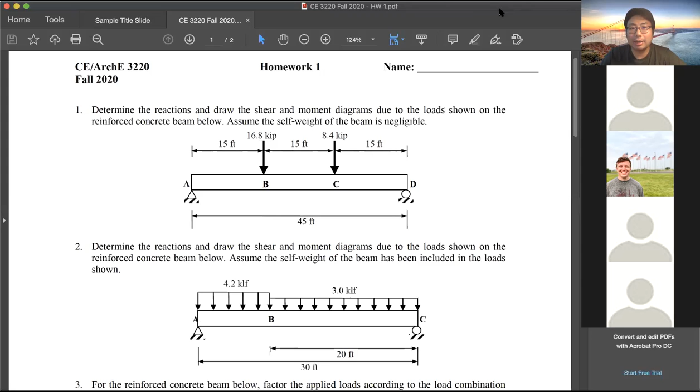So let me share the screen of the lectures. This is actually the first homework. You're gonna see something similar to that, not exactly identical, but something similar. So it's gonna be problem answers.

We have like 5 or 6 or 7 of each type of problem, so you need to solve them. Now for the format of the homework, what we need you to do is use either engineering paper or a blank white print sheet. Scan it or take a photo of it and convert it to a PDF file, then upload it to the assignment tab on Canvas.

Now, I want you to either print this out as a cover sheet, or when you're working it out one by one, copy the problem first. Throughout this copying process, by looking at the problem itself, you will not miss the key information from the problem. So that's mandatory. If you just turn in answers, the grader might have trouble identifying which problem that is, so we may take off some points. Make sure you have the problem copied at the first page.

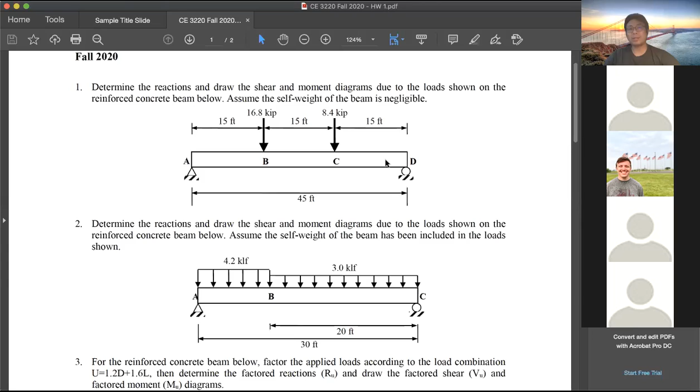So we'll talk about some of the problems, but before that, let's go back to the slides. We finished talking about chapter 2, which is design. So I want to do a little bit of review on what we talked about last time.

So I have this question. If I have a design strength and I want to get my nominal strength, and then once I have my loading, I will get my ultimate strength, MU. So on my left-hand side I have MN, which is nominal strength, and on the right-hand side is the ultimate strength. So which one should be higher? Nominal strength MN or ultimate strength MU?

Khalid, you still there? Yeah, I'm here. Oh, I'm sorry, you're gonna be my first victim today. It's okay - MN should be greater than MU, or equal to. So you think MN should be bigger than MU or equal to, right? Yeah. Okay, that's the correct answer. Good. So the key thing is we have to make sure that the nominal strength is bigger than the ultimate strength. That's from the second chapter.

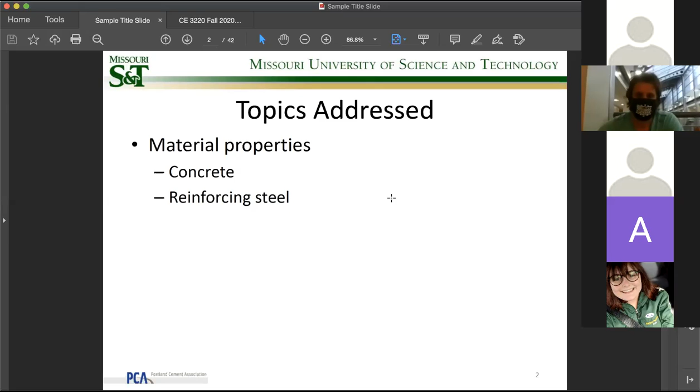Now, once we finish the design process, we'll start looking at materials. So for reinforced concrete, of course we'll have the concrete, and we also have the reinforcing steel. So today we're going to talk about them separately.

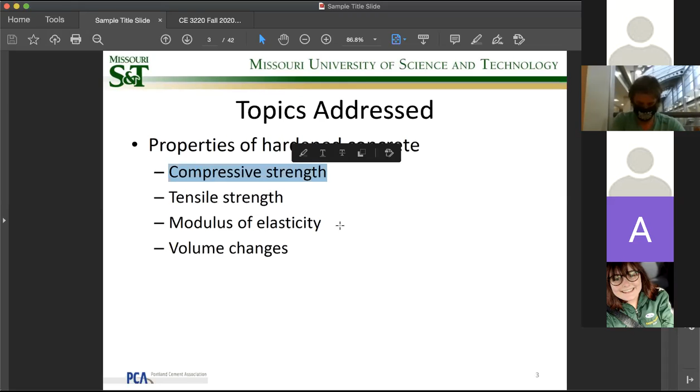First of all, concrete. We know concrete has a wet or dry state, uncured and hardened state. Right now we are mainly interested in the hardened state. For the design purpose, these are the parameters we're interested in: compressive strength, how much concrete can take in terms of compression; tensile strength, how much concrete can take in terms of tensile stress or crack; modulus of elasticity, Young's modulus; and volume change. These are the 4 critical parameters we're going to use to evaluate the concrete.

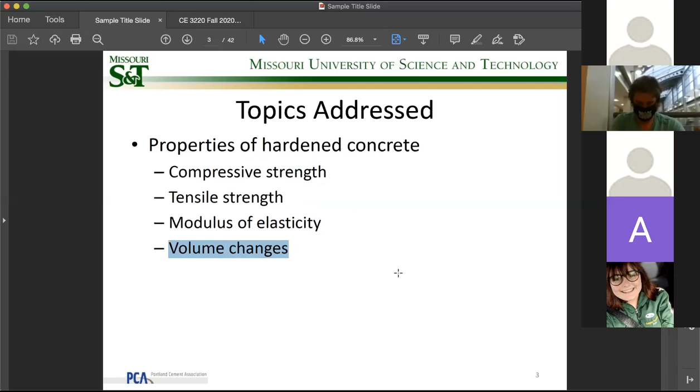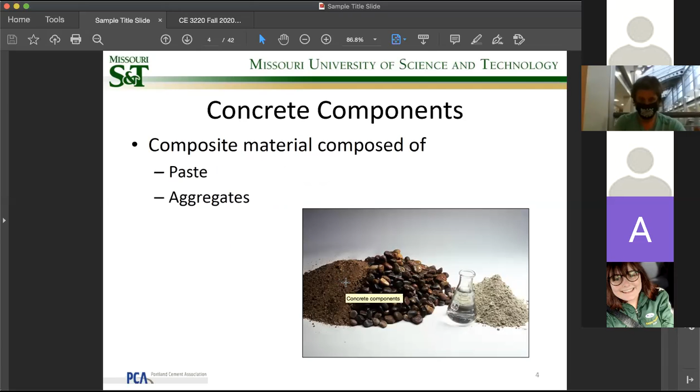Concrete is composed of a paste and aggregates. We have the coarse aggregates like pebbles or rocks, and the paste and powders mixed with water, and then everything cemented together. That's the composition of concrete properties. Now the paste is actually a very ancient material, dating all the way back to Portland cement. Actually, the ancestor of that is pozzolan cement, which includes fly ash, silica fume, and ground granulated blast furnace slag.

These pozzolan particles, you can think of it as more like volcano ashes nearby volcanoes, where ancient people used this ash to mix as cement. They built a lot of buildings with it, and some of them are still standing today.

Portland cement is more of a modern construction material, and it's more chemically fabricated. We take some of the slag and dissect them into small particles and functionalize them to make Portland cement. And from the cement, adding some water, we have our paste.

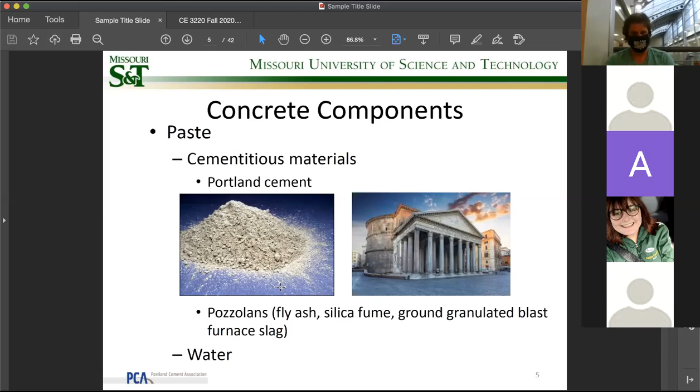From the aggregate side, we have two types of aggregates: coarse, which means gravel or crushed stones, or fine, sand. We usually get the fine sand from rivers or some seabeds. We don't usually use the seabed sand.

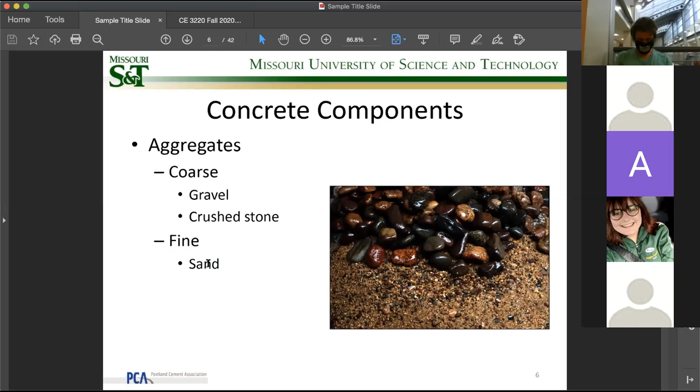The difference between river sand and seabed sand: river sand is more of sediments, their tiny particles having been filtered from water washing them. Seabed sand usually contains microbial organisms or animal skeletals. Typically, sand from ocean beds is pretty weak and ductile, so we don't usually use them as construction materials.

So we have all these components together, and they're organized in terms of percentages. These are general descriptions of the components. The paste takes usually about 25 to 40% - that's the majority part of the volume. Aggregates take about 60 to 75%. So you can think of concrete essentially as just aggregates binded by the cement. Hence we usually call the cement a binder or binding material - like glue to glue those big rocks together.

So we don't usually use a lot of cement, because cement is expensive - it's kind of expensive. So the cement is only 7% to 15%, a very small portion of it.

And we use quite a bit of water to mix it - 14% to 21% water. We also need some air, and the main purpose of the air bubbles is to allow the concrete to flow better. So that's a rough composition of the concrete materials.

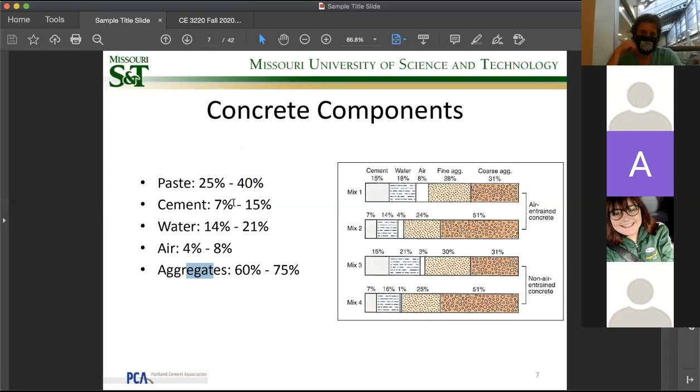So what are the important parameters for concrete we need to evaluate? First of all, we need to evaluate in terms of strength - that's for hardened concrete. The quality of the hardened concrete, meaning strength, is highly dependent on the amount of water used.

So the water-cement ratio is very critical. A higher water-cement ratio means your concrete is more flowable, liquid, but during hardening it has low strength. A lower water-cement ratio means you have higher strength, but it's very hard to work with. So there's a balance for the optimum water-cement ratio, depending on your need.

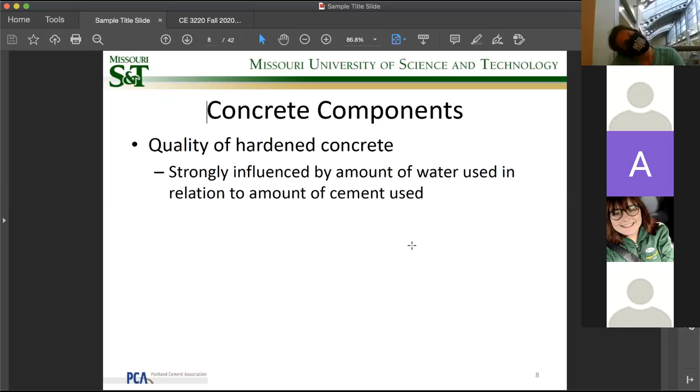We like to reduce water as much as we can to enhance the strength naturally. But reducing water doesn't always bring us benefits - sometimes it also brings disadvantages. But before that, let's take a look at the advantages of reducing the water ratio.

First, by reducing the water ratio, we increase compressive and flexural strength, making it stronger. What happens is, due to a low water-cement ratio, we have full hydration of the materials and are left with very few air bubbles afterward, after the water evaporates. So we have fewer structural defects, enhancing the compressive and flexural strength.

Because of the low porosity induced by this reduction in water content, we also have lower permeability. So the concrete is more impervious to water erosion or chemical attacks, which keeps the structure living longer.

So naturally, it also increases the resistance to weathering. How does that work? Say I have less amount of pores - that means less water or moisture goes into the concrete when it's wet. So naturally we have less of a freezing effect, as you all know from Physics 101: when water freezes, it increases volume, the ratio is 1.1. So with less pores, less intruded water, you get less volume inflation, less volume changes. So it has better weather resistance.

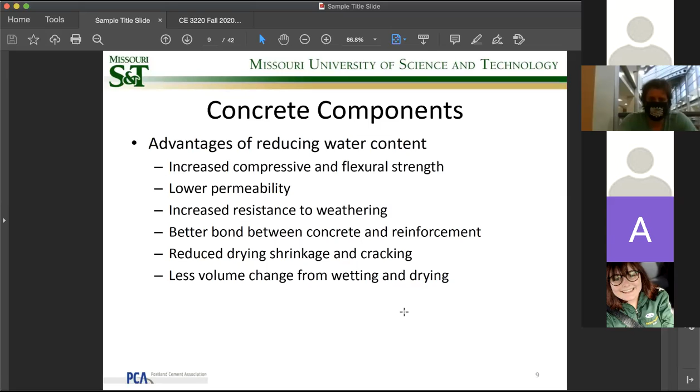Apart from water-cement ratio, a very important factor is admixtures added to the concrete. We have air entraining, water reducing, plasticizer, accelerating, and retarding agents. The main purpose of these chemical admixtures is to enhance the workability or strength of the concrete.

For example, if my concrete has a flow problem and simply gets stuck, I can add air entrainment. Air entrainment works like tiny lubricants between the aggregates and cement, letting the concrete flow more easily. It's like blowing bubbles inside muddy water; it actually flows faster.

And we have water reducing agents. Sometimes we add a lot of water at the beginning to allow fast construction, and after the concrete is poured, we want it to achieve early age strength, so we use a water reducing agent to extract the water out.

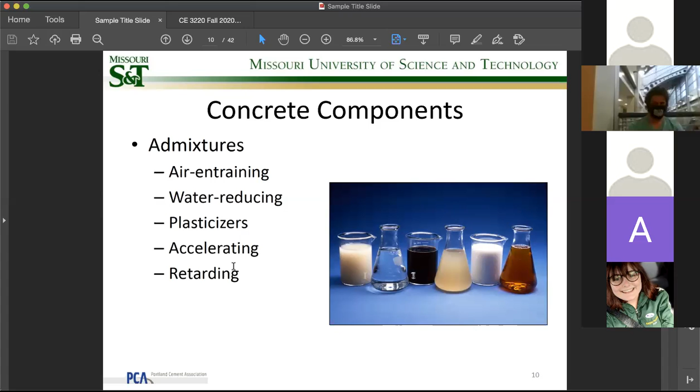We also have other admixtures. If we say these previous admixtures have immediate impacts on concrete, the following admixtures have a long-term effect. The most popular ones are corrosion inhibitors - chemical inhibitors added to the concrete to block the reaction pathway of corrosion.

So we have two types of inhibitor. One is chemically active, the other is physically active. One basically reacts with the chemical agent to slow down the reaction. The other simply blocks or fills the pores, reducing the amount of water that can transfer from the exterior surface.

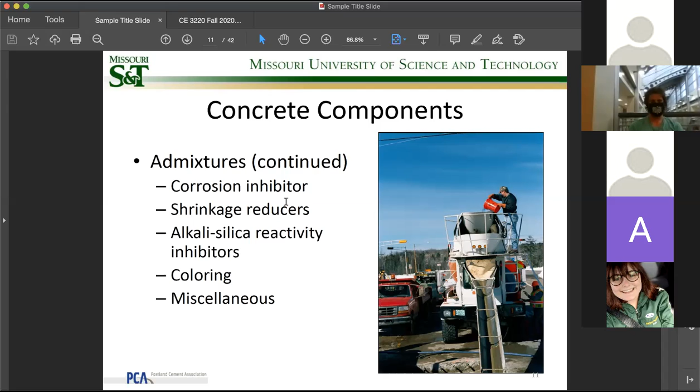to the reinforcement, okay? Now we also have shrinkage reducers that can reduce shrinkage, ASR inhibitors, alkali silica reactivity inhibitors, that's more of a chemical inhibitor. We have coloring, and we have all the other things for long-term performance of concrete. So it's a very well developed industry, we have so many admixtures to work with.

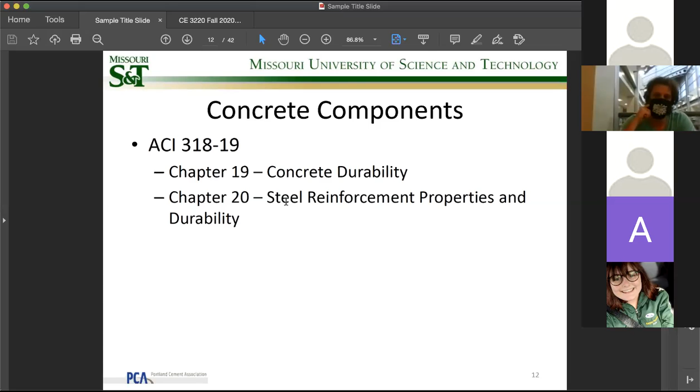Now, in terms of concrete, if we want to look at the properties of concrete and make sure they're following the standards needed for the design code, chapter 19 and 20 are the ones we're looking for here. So if you go to your ACI code book, chapter 19 and 20, you can find all the code related information.

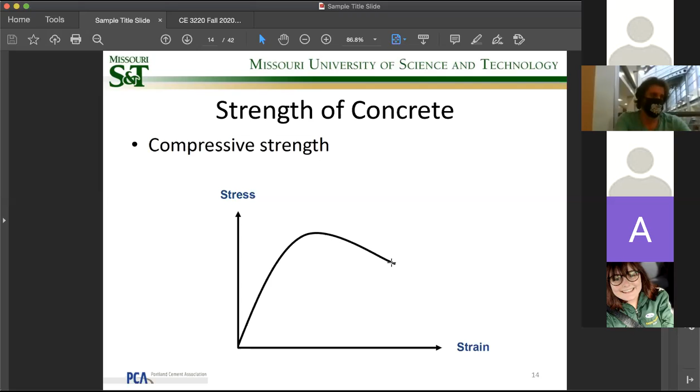And then for the compressive strength testing, we usually use a 6x12 cylinder.

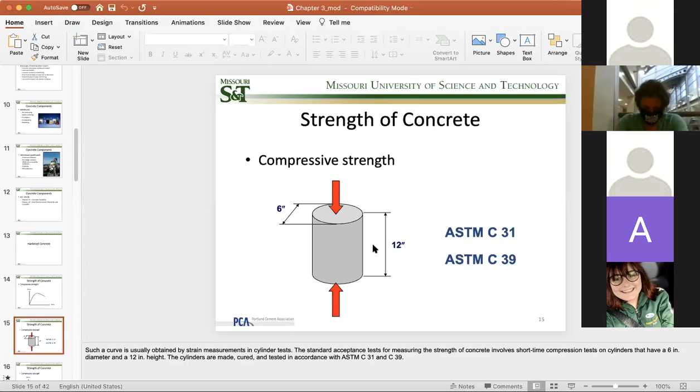All right, so we talked about the compressive strength. This is what it looks like. Now, there are several critical parameters we need you to understand. The peak strength, or the maximum stress you can get from a compressive strength test, is called F prime C. Later we'll introduce everything that we care about with concrete being related to this parameter, F prime C. This is the critical parameter you need to know.

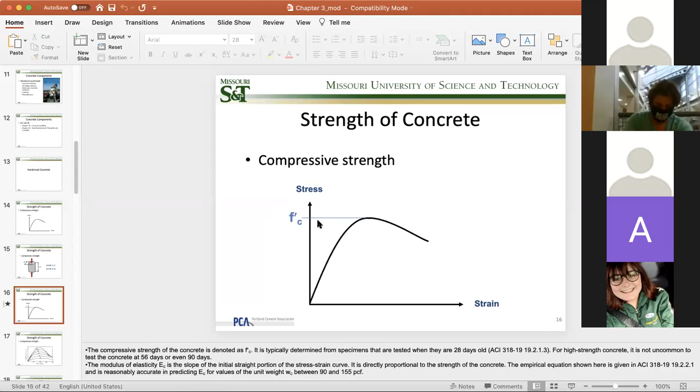As a matter of fact, if I have a different strength, this is what the curve will look like. You can see that if my strength is low, my curve is pretty flat, meaning I have a reduced elasticity modulus, a reduced strength, and an elongated failure strain. But when my strength goes higher, it becomes quite brittle. I have a higher elastic modulus, and a sharper drop in terms of strength.

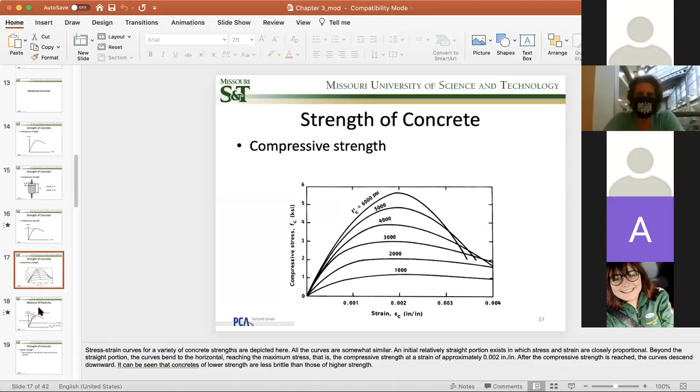To analyze this curve, these are some of the properties we need. So if I take the tangent line, I will have the tangent modulus of the material. But instead, we are using the secant modulus for the material properties. And this secant modulus is actually an equation. Let me put it here. The secant modulus is actually an equation of the peak stress.

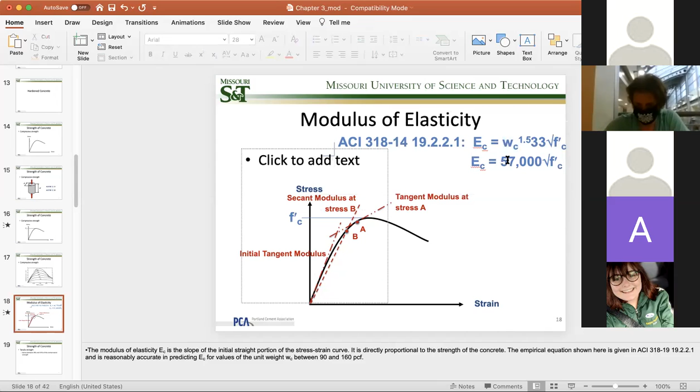There are two types of formula here. One, we can use the specific density of the concrete, WC to the power 1.5, multiplied by 33 and the square root of F prime C. F prime C is the compressive strength we just mentioned. Or we can use 57,000 times the square root of F prime C. This equation, 57,000 square root F prime C, is the one we use most of the time to estimate the elastic modulus, or modulus of elasticity, for the concrete.

If I give you the compressive strength F prime C in terms of PSI, the unit matters, you can plug it into this equation to get its Young's modulus or modulus of elasticity.

I think most of you guys have gone through the mechanics of materials class, so I'm going to randomly pick a student to help me out on the definition of modulus of elasticity. Let me go down my list. Adam, Mr. Hart, hello? Are you there?

Yes, I am. So my question here is about modulus of elasticity. Modulus of elasticity will give us a strain if I know the stress applied to the material, right? Or vice versa, if I know the strain the material is experiencing, and I have a Young's modulus, I can calculate the stress, right? So in simple terms, Young's modulus or modulus of elasticity equals stress divided by strain. You know that from mechanics of materials, right?

Quick question is, what's the unit for Young's modulus, or for modulus of elasticity? Shoot, I should know this.

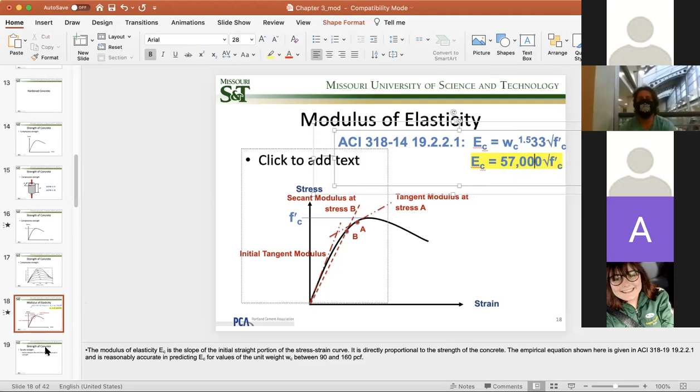So always follow the unit of pressure, okay? Good, that concludes the compressive strength of concrete. In terms of tensile strength of concrete, it's roughly in the ratio of 8% to 15% of compressive strength.

Now let me say something about the compressive strength of concrete. We normally divide concrete into these categories. Any strength below 4,000 psi is weak concrete, used for curbside or some paving, like hiking road paving, but not highway paving—that's low strength concrete. Strength below 6,000 psi is called normal strength concrete, so usually 4 to 6 ksi is normal strength. Strength beyond 8 ksi we call high strength concrete.

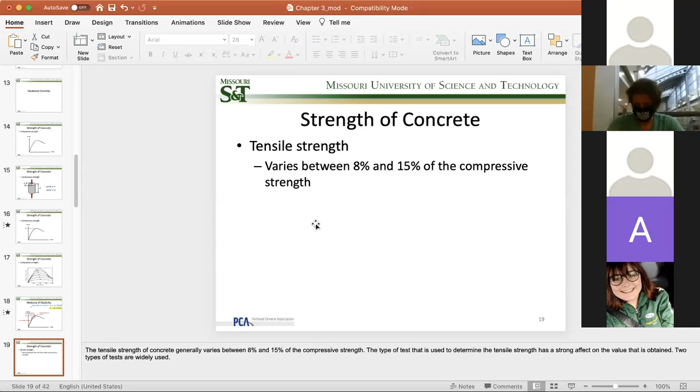So now, if we take a normal strength concrete, say 4,000 psi, 10% of that is... what is 10% of 4,000? Austin, Weicker, sorry, are you still there? Yeah, I'm here. What's 10% of 4,000? 400.

400, right? Have you done the material testing lab yet? I did take that last semester, yes. Okay, so do you know what roughly 400 psi is equal to?

It's not a lot, right? So give me an example—what's your household pressure washer, normal pressure, get up to? I actually don't know that. Okay, a couple hundred psi maybe, 50 to 100. Actually slightly higher than that—say for example my pressure washer I just bought last week has about 2,000 psi, and that's like household pressure. So 400 psi is like 1/5 of that, so it's very, very low pressure, isn't it?

Right, yeah. So the tire pressure for your car is about 30 to 40 psi. If you've checked your tire pressure, it's about 30 to 40, 32-ish, something like that. So 400 psi is about like, say, 10 to 15 tires worth of pressure, something like that.

Okay, so why am I saying these numbers? Thanks for the answer. I'm saying these numbers because I want you guys to know that the tensile strength of concrete is very, very low. I gave you a comparison.

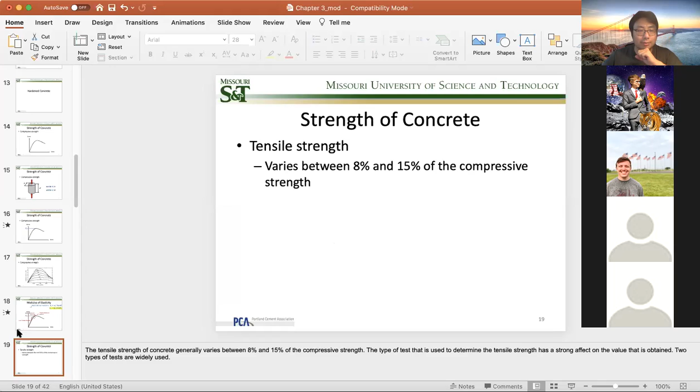The tensile strength of concrete is very, very low, so you will never rely on concrete to take any tension. It's always going to be the steel taking care of the tension. The concrete is good for compression, and the steel is good for tension. So never use concrete for tension, always use reinforcement for tension.

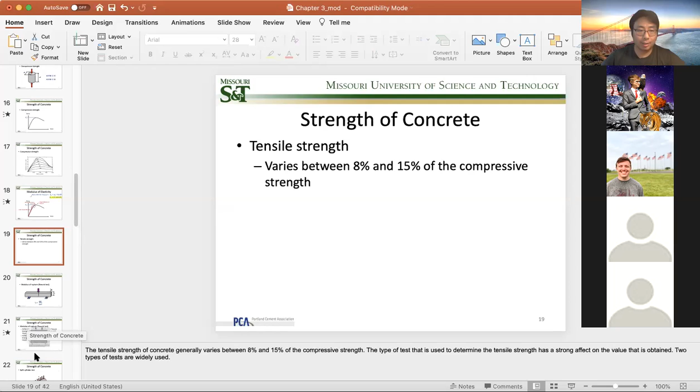Since the tensile strength of concrete is so low, it's of our interest to find out what it is.

We're gonna order a new ping pong net on Amazon. You're not muted, I can hear it. All right, okay, good. So let's get back to our tensile strength of concrete. I'd love to order something myself, but anyway.

So the tensile strength of concrete is very low, so it's of our interest to find out what it is. There are standard tests for us to test the strength of the concrete.

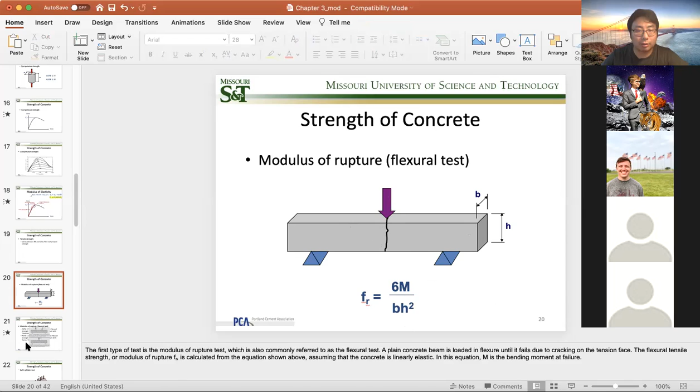That is calculated as FR equal to 6 times the moment, the bending moment exerted on the specimen, divided by B, which is the width of the specimen, times H, which is the height of the specimen, to the power of 2. So this is the equation we use to calculate the tensile strength of concrete: modulus of rupture.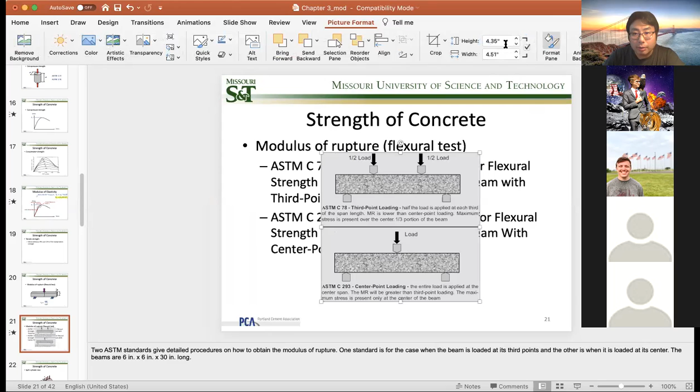So there are two types of tests: we have the 4-point load and the 3-point load. The 3-point load is also called center point loading. The lower scheme shown here is the most often used test.

Now for the tensile strength, there's another faster way using the same cylinder. We apply a line of pressure on top of the cylinder by supporting two ends of it. Through this experiment we also get the strength, but the stress distribution is not uniform.

As you can see, when we apply pressure on the top and bottom, there will be concentrated compression, and then afterwards it generates a tensile stress in the middle. When the tensile stress in the middle reaches its peak strength, it busts.

The equation to calculate this type of test is called the split cylinder test - just splitting a cylinder. It's FCT, where the subscript FCT equals 2 times the applied force P, divided by pi times L times D. L is the length of the cylinder, D is the diameter of the cylinder. That is the equation used for the tensile strength of concrete tested from the split cylinder test.

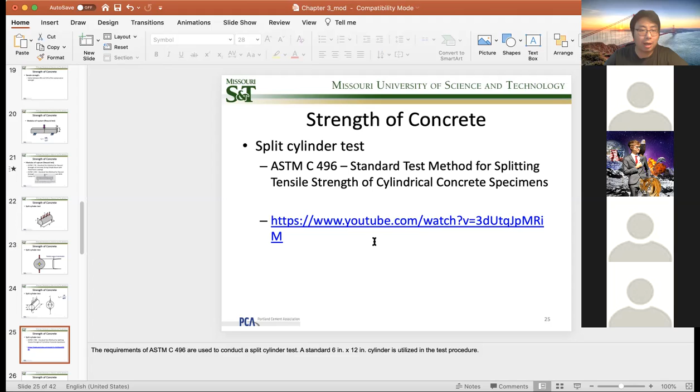Split cylinder test - there are a lot of standards. For the sake of time, you can watch a YouTube video on how they test it, so we're just going to skip ahead quickly.

There are relationships between compressive and tensile strengths. We know they grow proportionally - if the compressive strength is high, then the tensile strength normally is high too. The ratio between tensile and compressive strength decreases as the compressive strength increases, so there's a limit. If you increase the compressive strength indefinitely, your tensile strength does not increase correspondingly. So we say the tensile strength is roughly proportional to the square root of the compressive strength, F prime C.

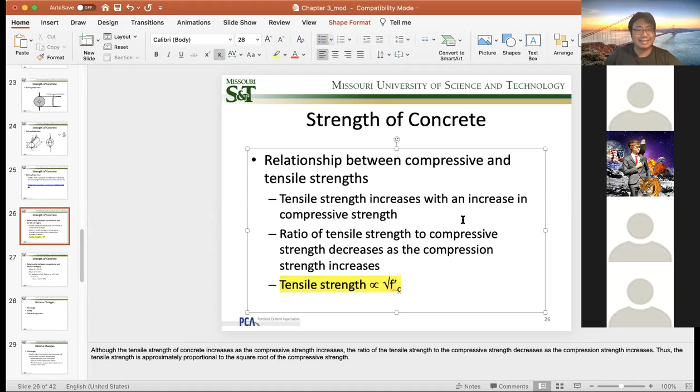All right, this is an important fact you need to know for the exam. For the strength of concrete, normally we test the compressive strength of concrete.

Sometimes we don't have the means and ways to test the tensile strength of concrete because it requires facilities. So what we do usually is use the compressive strength F prime C to estimate the tensile strength of the concrete.

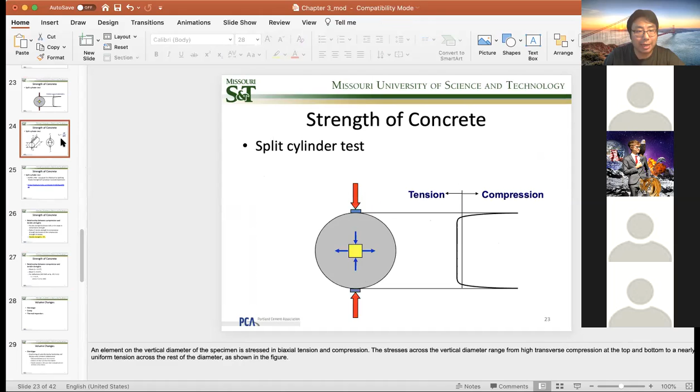So there are two tensile strengths we just mentioned. One is called the split cylinder, which is FCT, and the other is directly from the beam bending, which we call FR. So these are two types of tensile strengths.

The estimated relationship between them is that the split cylinder equals 6.4 times square root F prime C, and the modulus of rupture equals 8.3 times square root F prime C. But for deflection calculations in our code, it's 7.5 lambda square root F prime C for modulus of rupture.

For your homework, I want you to use this equation universally: 7.5 lambda square root F prime C. Now lambda is a type of concrete coefficient.

Lambda normally equals 1 for normal weight concrete. Let me type this out - normal weight concrete. And lambda will equal what? Lambda will equal 0.75.

Let me write down here, that equals 0.75 for lightweight concrete.

So be careful when you read from the problem, sometimes it's lightweight, sometimes it is normal weight, so we have a different factor here. The reason behind it is that when we have lightweight concrete, the aggregates are sometimes porous, so those are weaker aggregates and reduce lower stress.

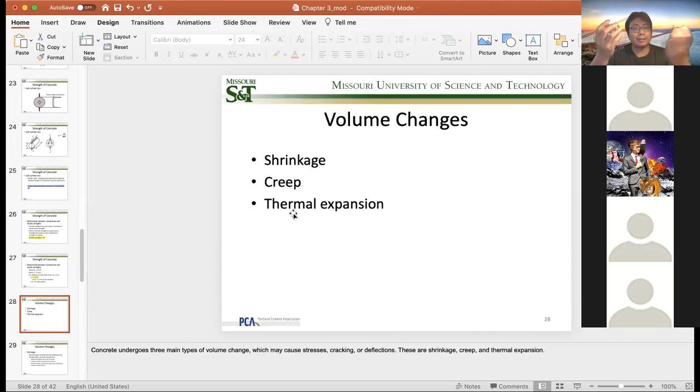All right, so talk about the shrinkage. What type of shrinkage do we have? First, we have the shortening of the concrete due to hardening, drying under constant temperature. So moisture means water just comes out from concrete through diffusion, and we have the outside surface that shrinks faster than the inside.

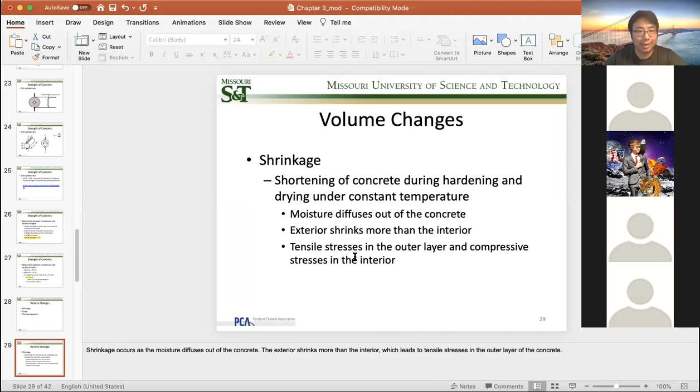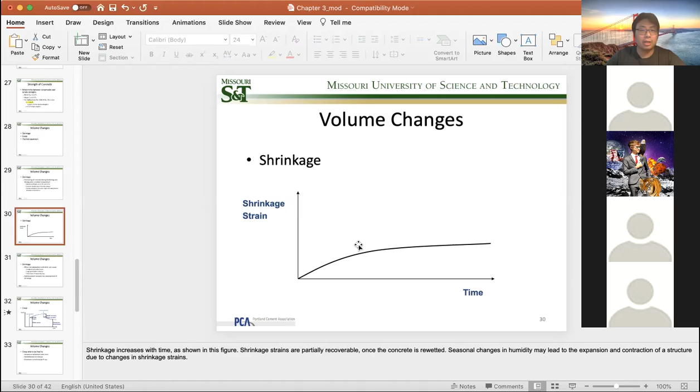All right, so for the volume change, the other more important factor is creep. So for now, I want you to know that there's a certain threshold.

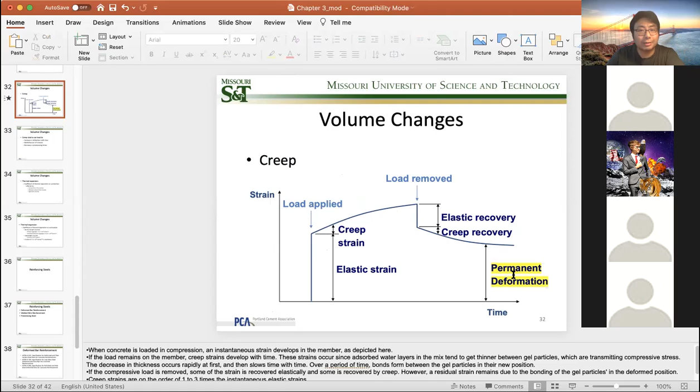So one message I want you to remember about creep is that creep will cause permanent deformation to your concrete structure. So creep is bad.

So the creep strain can lead to increasing deflection over time, meaning your bridge can sag, your building can - well not really collapse, but can shrink or tilt like the Pisa Tower, although Pisa Tower does not tilt for the same reason. It can also cause redistribution of stresses - basically some members might give up and others have to take more load. And it can also decrease the pre-stressing forces.

You learn from lectures in senior classes where you use pre-stressing concrete. Basically, you pre-stress a tendon reinforcement to let the structure become more rigid and take more load. But if your concrete creeps, it just reduces that force, so it doesn't have the effect you wanted.

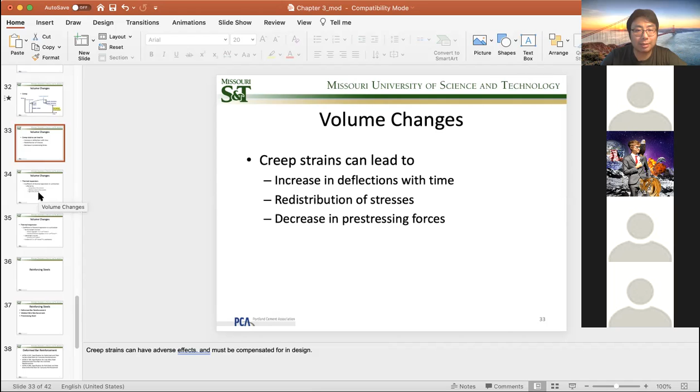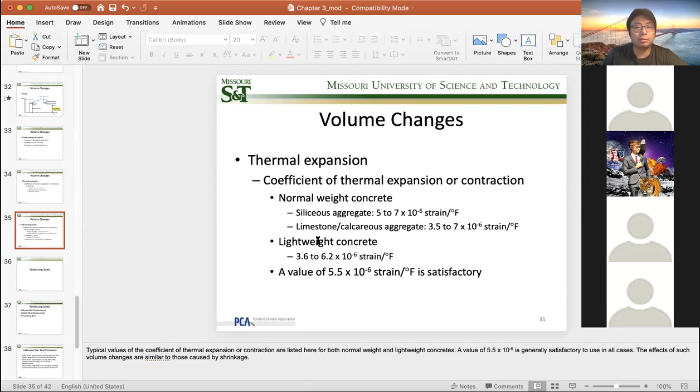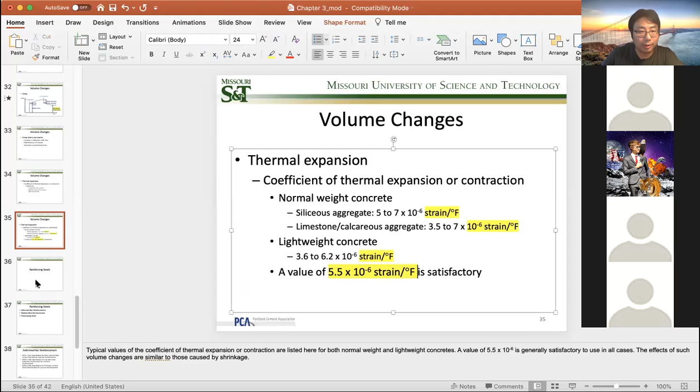A quick number you need to remember is the coefficient of thermal expansion. It's about 3 to 7, 10 to the power minus 6. The unit here is very important: strain, meaning no unit, per degree. I want you to remember this unit. These are roughly the levels of coefficient of thermal expansion. As you can see, 5.5 is the standard value we use for concrete, so not so much to worry about for concrete.

So far, let's do a quick overview or quick recap. All you need to do when you get the concrete: first, you do the compression test to get F prime C.

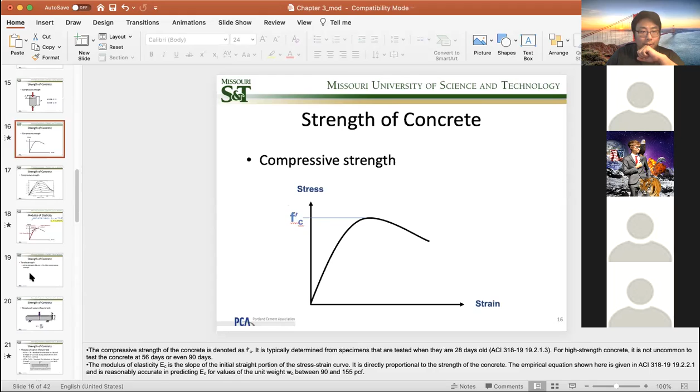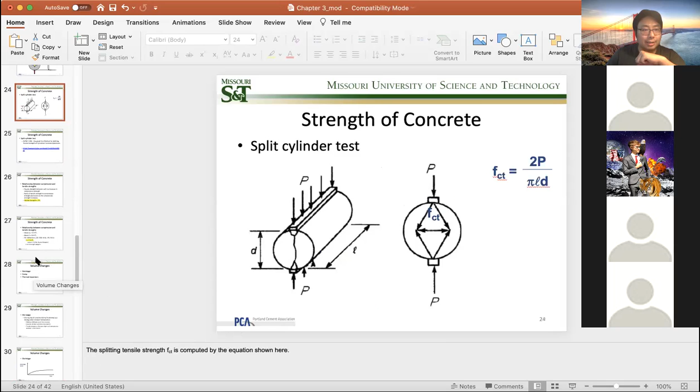If you have facility, you do the tensile test to get FR, modulus of rupture, and FCT, the split concrete cylinder split tensile strength. If you don't have these ways to test the concrete, you use the equation 7.5 lambda square root F prime C to estimate the tensile strength from the compressive strength.

But regardless, you always have to do the cylinder crushing test. This is the must. All right, so that's all about concrete.

So it's about the time to wake you up again. I'm thinking about the question: why do we need to have ribs for the bars? Okay, I'm gonna call our next victim. Who's on here? I'm gonna pick Dalton.

Yep, you still there? Yes, I am. All right, great. So the question is, why do we have to have ribs in a rebar? My guess is so that it can adhere to the concrete better, so there's no slipping inside the concrete once it's placed. Exactly, right, the slipping.

So let me ask you this: do you think we can put any rib on the surface of the rebar, or does it have to be a specific shape? I am not sure. My guess is it would depend on what we're using it for, what type of reinforcement it is. Okay, that's a good question, I'll let you go on this. So yes or no? Yes, it does depend on it, but no, we don't care that much.

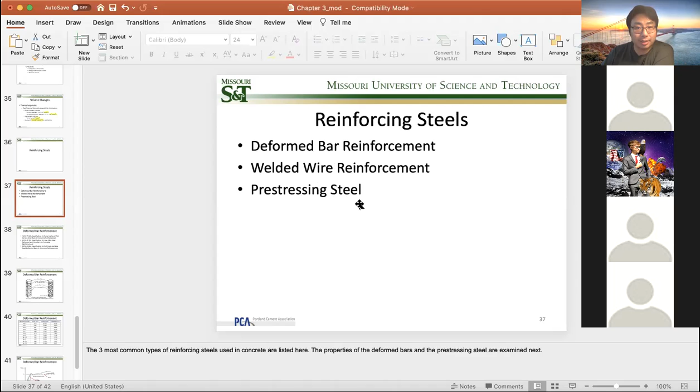All right, so there are a lot of standards for the rebars. I don't have to elaborate, you can find them. But I want to talk about the reinforcement details, these markings on the reinforcement. So let's take a quick look.

So if you're a civil engineer, you go on a job site, you pick a rebar, you read these letters, you can tell the construction workers what type of bar they are. You should be able to, or they'll laugh at you. I'm just joking, but anyway.

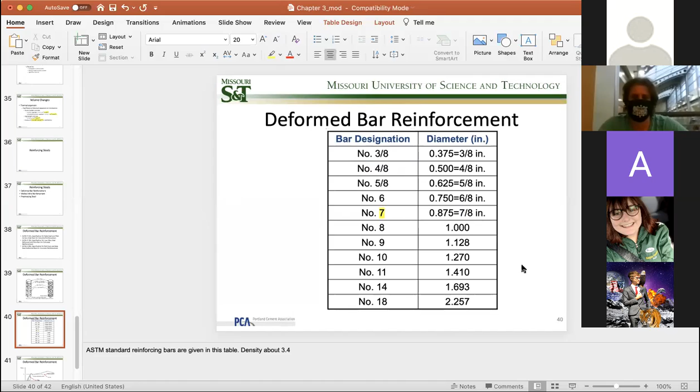That's right. So essentially, how the bars are numbered is 3/8, 4/8, 5/8. So when we say number 3 bar, it's 3/8. Number 4 bar is 1/2 inch. Number 5, etc. So this is just some of the rules that we use to remember the bar size.

Matter of fact, if I recover it for this simple trick here, you can actually use that to calculate the area. There might be a slight difference just because some of the ribs were not considered, but this is roughly equal to the conversion from the diameter.

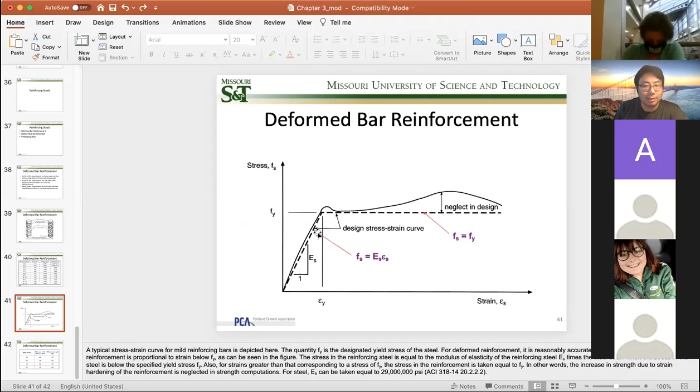I have a bump, and then it gradually comes up again and goes down again. Now, really keep in mind here, this curve is for hot rolled steel. Cold rolled steel does not give you performance like this. You'll probably know that from the steel structure design course later, but this is for hot rolled steel. So the distinct feature of the hot rolled steel is I can use this dashed line serve as a backbone envelope of this curve.

Basically, I can say your stress strain relation for the steel bar is a linear line and flat. And I'm going to take this peak strength here, Fy, of this flat portion as the yield strength - very important - the yield strength of the reinforcement.

Fy, this is called the yield strength of the rebar, okay? And this is our design strength. So the grading we're talking about here, 60, is actually the yield strength of the bar. So how so?

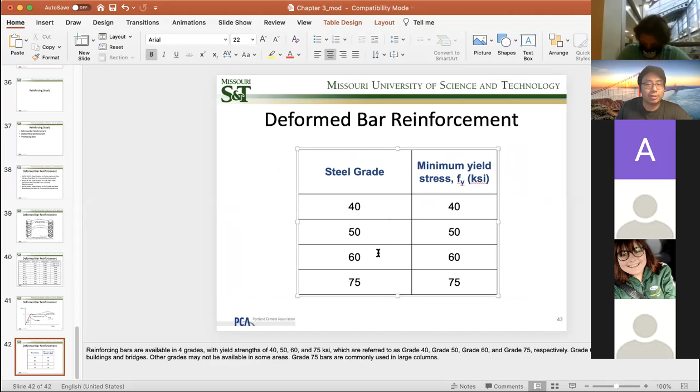If the grade is 40, that means I have a minimum yield strength of 40 KSI. The ultimate strength is 70 KSI, but I'll save you the trouble, just delete that. All you need to know for this reinforced concrete structures course is the yield strength, Fy. So grade 40 means 40 KSI, grade 50 means 50 KSI, grade 60 means 60 KSI, grade 75 means 75 KSI. You usually do not see any number beyond 75, that's as high as you can go.

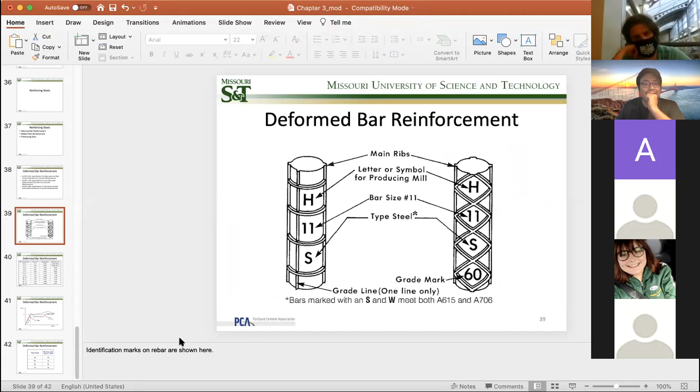So I'm gonna make a quick test here. Say I have a grade 60 rebar and a grade 40 rebar, and naturally 60 is higher than 40. So for the sake of construction, should I use all high strength rebar, or should I use different strengths of rebar? I'm gonna call on Aziz Alamari. Should I use universal strength for the rebar for all my buildings, or can I use different strengths for different locations?

Why do I use universal? Following the book, following the industry standard, we want to use universal to save cost. You're absolutely right, but actually, for design purposes, we use different sizes, we use different grades. But that's close.

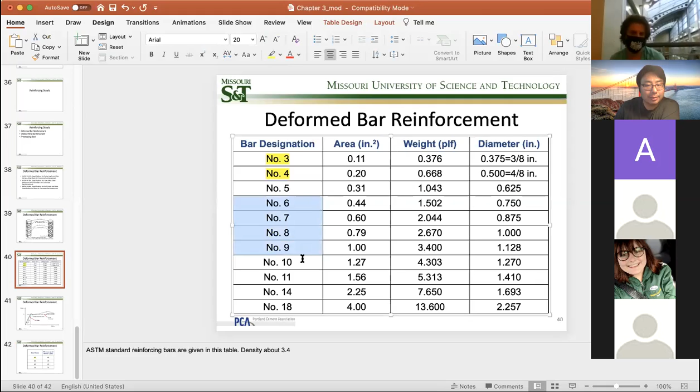So normally for the stirrups, for the hoops, for shear resistance, for the tiny size stirrups where we cannot have large diameters, we can only use number 3 or number 4 bars. That means if we use number 3 and number 4 bars, we'll normally pick grade 40. If we use number 6 or number 8 and above as the main reinforcement of beams and columns, we usually use grade 60, sometimes grade 75.

So take a look at this. The yellow highlighted 40 is usually for stirrups, for shear, for hoops, and 60 and 75 are for main columns and main structures of buildings. So these are some subtle differences.

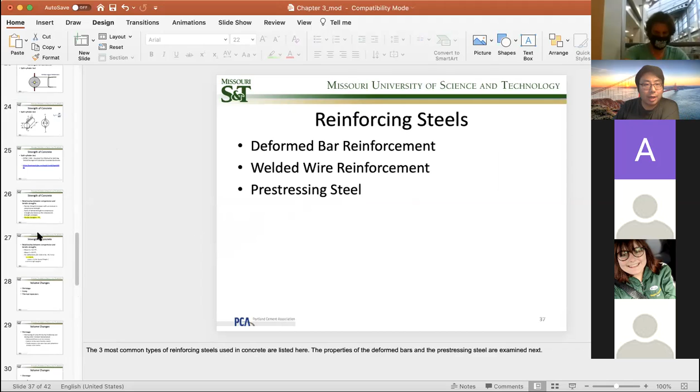All right, at this point we are actually done with chapter 3. So let me quickly recall. For the concrete, here are some of the questions I might ask. What kind of experiment or test do I perform to get a compressive strength? And that is the concrete cylinder test, compressive strength of concrete cylinders. And I forgot to mention this.

Usually we test concrete cylinders at different times, in days. We have the 3 day, 7 day, these are called early age strengths. Basically we need to know whether the concrete is good or not. In the construction industry, if you cannot achieve the specified 7-day strength, you need to knock your building down. So it's very critical. And then we use the 28 day result as the compressive strength of the concrete. So be very careful here.

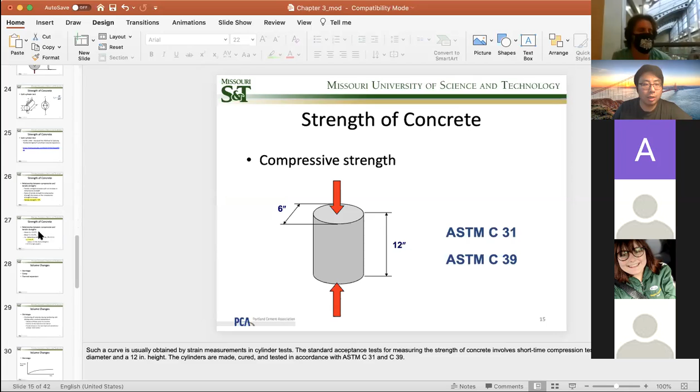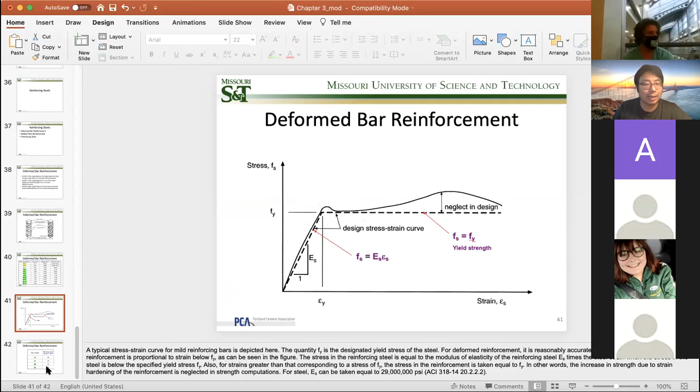Now for the steel, the most important thing is the yield strength. We need to know we are designing based on this yield strength, Fy. Of course, the size and marking, I'm pretty sure you got a handle of it, they're not difficult at all. So for now, we're just done with the concrete and steel part of it.

Any questions? Any questions for the steel and concrete part, guys? Anything you can think of?

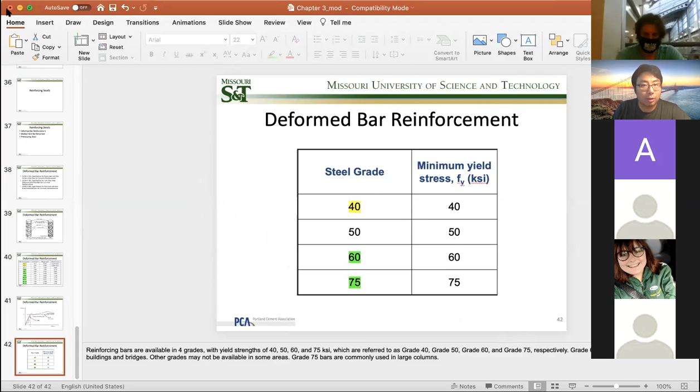All right, so I know you might be thinking about it, it's Thursday afternoon, everybody's tired and ready to go home. But let's stay on a little bit. I want to walk you through some of the homework problems. First, let me stop.